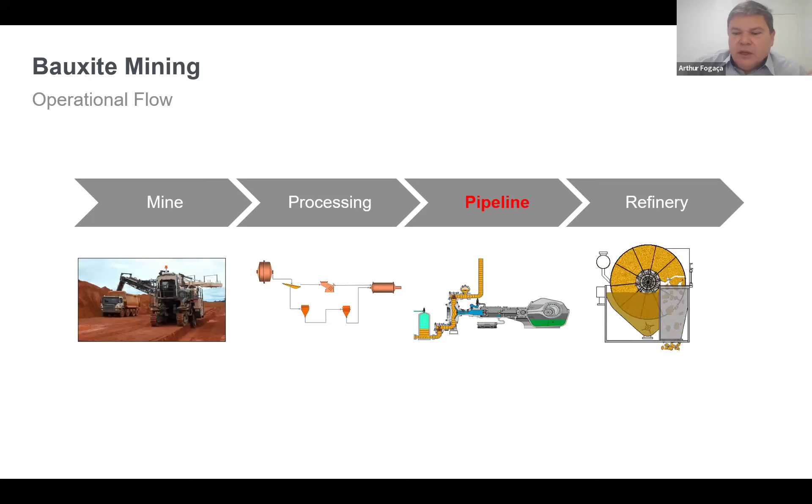And the next process is the refinery, which manufactures alumina. Here's an overview of the pipeline. This slurry line is placed in the northeast of Pará. As you can see in the middle of my screen, we have the route of this pipeline. It starts at the mine, placed in the Paragominas municipality, crosses seven municipalities, and arrives at the refinery in Barcarena, near I believe 50 to 70 kilometers from Belém.

The total length of this pipeline is 244 kilometers. We have two pump stations: the beginning of the pipeline at kilometer 0, and in the middle of the route, pump station 2, placed at kilometer 116.

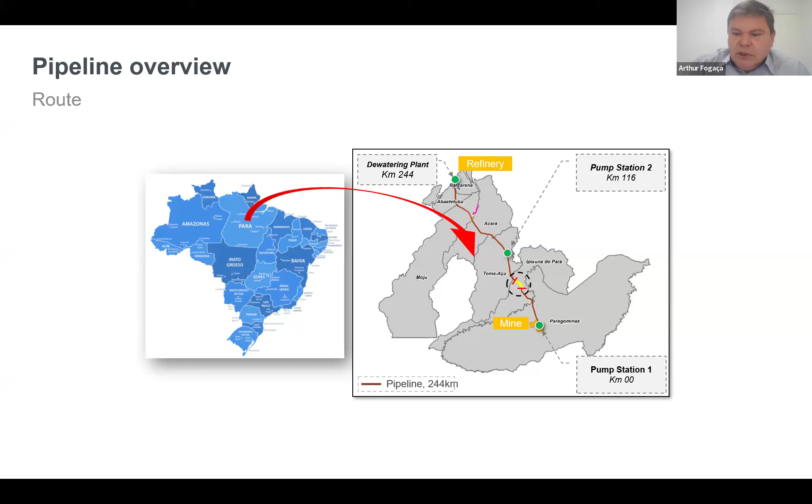This slide shows us some features about this pipeline, like age—it's almost 17 years. The total length, as I said, is 244 kilometers. The external diameter is 24 inches, and the pipe material is a very common carbon steel, API 5LX70. The wall thickness ranges from almost 8 to 20 millimeters.

The speed of this slurry is 1.7 meters per second, and the total travel time is 40 hours. The capacity of this pipeline is almost 11.3 million tons per year, and the concentration of solids in this slurry is 50.5% bauxite ore, with the other part being water.

In this picture I brought some samples of bauxite slurry, showing the color of this slurry—we're talking about slurry solids. Another point is particle size specifications. I tried to explain with this picture the granularity of the slurry; we have several types of particle sizes in this slurry.

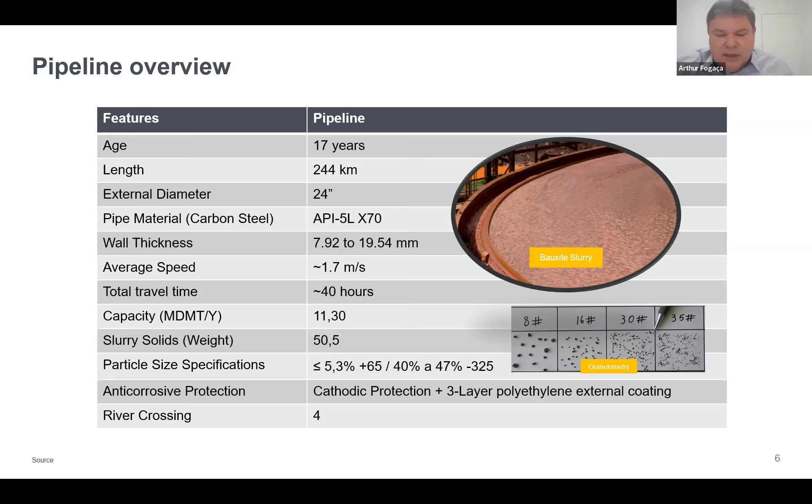I will explain the next slide. This graph shows the profile of this pipeline. In the horizontal axis, we have the distance in kilometers, and in the other axis, we have the height.

The pump station at the beginning of this pipeline is placed at 120 meters above sea level. Along the route, we have another pump station, placed at 116 kilometers.

At this point, at the end of this pipeline, we have the dewatering plant. I'll bring more details in the next slides.

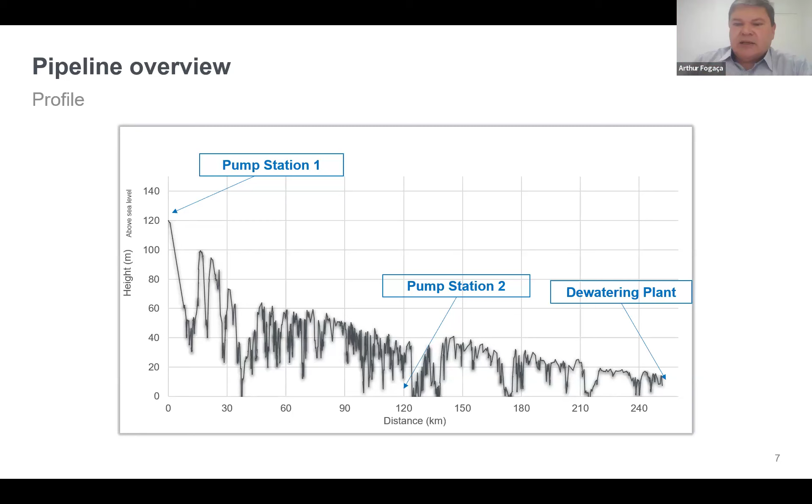Here we have some pictures about the facilities of this pipeline. In the top left corner, we have pump station 1, the beginning of the pipeline. On the opposite side, we have pump station 2, placed in the middle of the route.

Below this picture we have a DPB, which means the dewatering plant bulk site. Along this pipeline we have 4 PMS, which means pressure measurement stations. That's a small container with a branch with an intake to a sensor that transmits data about pressure and temperature by optical fiber to the control room.

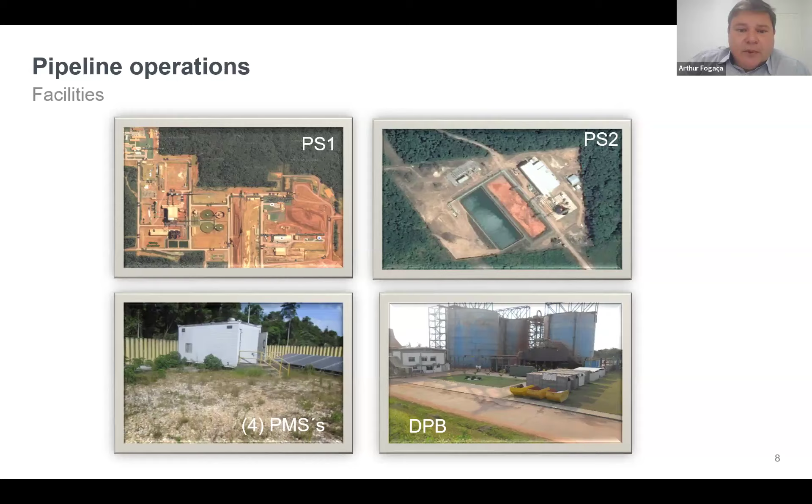Here we have the features of the pipeline. It crosses 4 huge rivers, huge rivers meaning 800 meters to 1 kilometer of width. We use a methodology to cross this below the river, called HDD. HDD means building this pipeline below the river, pulling the pipeline so it crosses the river.

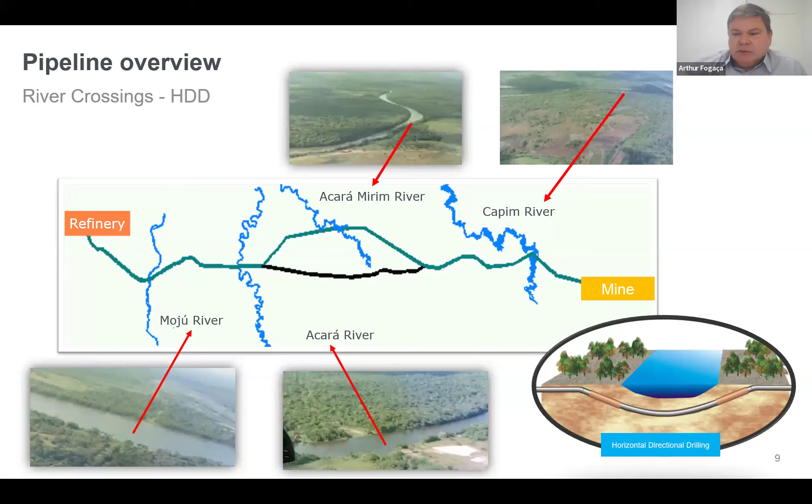After this, these storage tanks feed the mainline pumps, the 7 main pumps. That's a kind of positive displacement pump. After this, we start the beginning of the pumping process.

We restart the pumping process, and the slurry arrives at pump station 2. That station is like a twin of the first, but the difference is we have just 1 storage tank and 6 pumps, though the same kind of pumps.

After this, we restart the pumping process again, and we arrive at the end of this pipeline, placed at the dewatering plant. The dewatering plant is responsible for separating the bauxite ore from the water. At this moment, we start a new process in the refinery to process the bauxite ore.

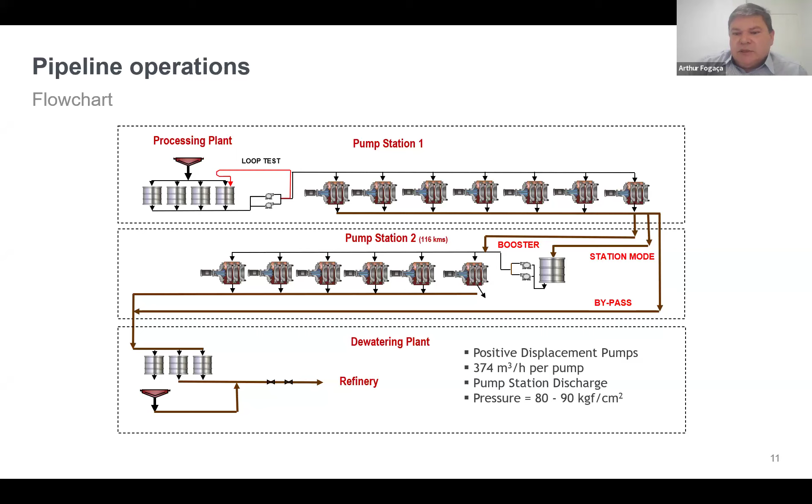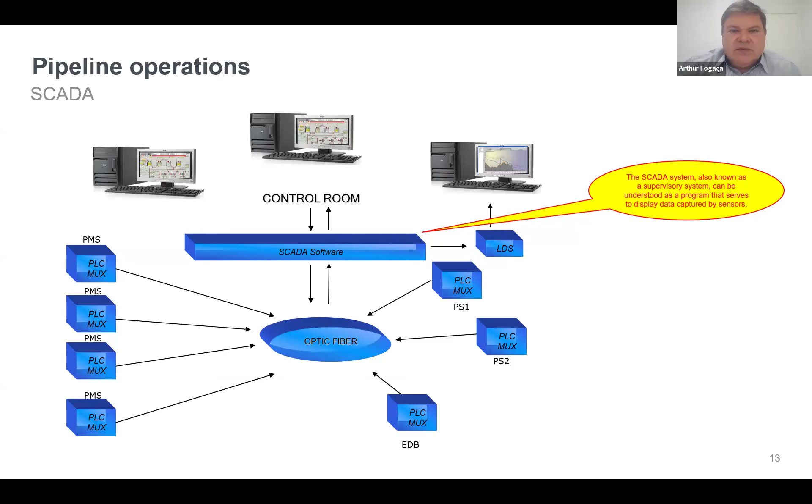Here we have a software called SCADA. It's very commonly used to monitor data in the control room. We have infrastructure here including PLCs, fiber optics, computers, and software too, all used to monitor data in the control room.

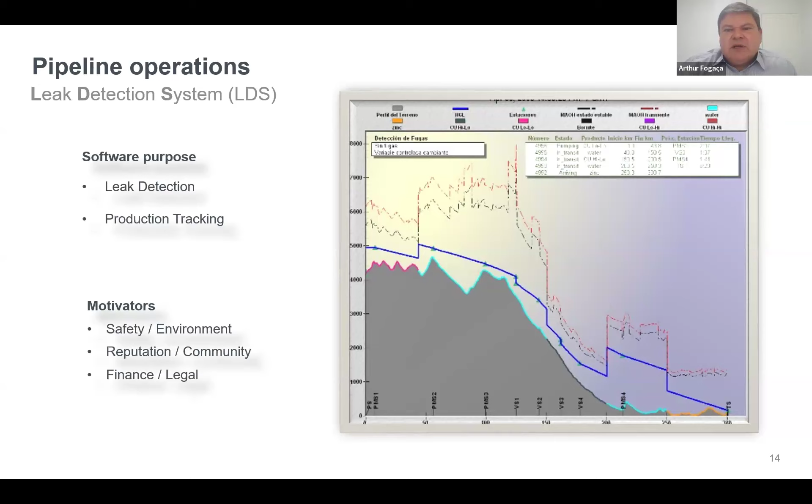This is another software very used in mining companies, called LDS. It monitors variables about flow rate and waves of pressure to detect a possible leak of slurry along the pipeline.

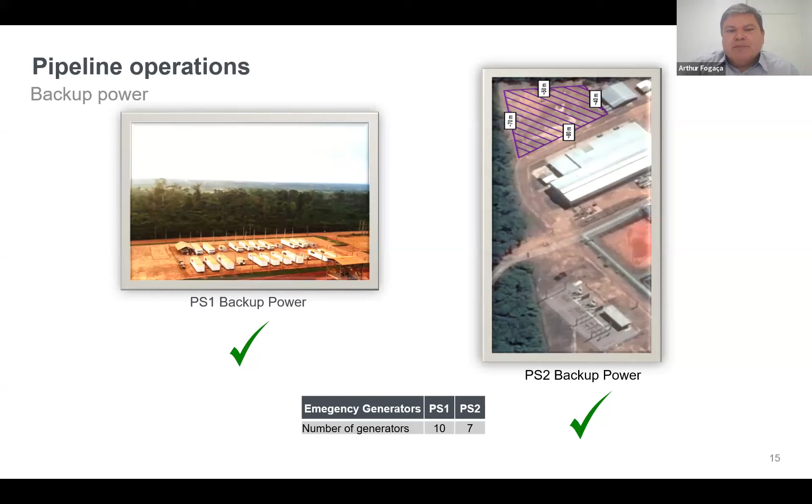Here are some facilities I shared with you. That's what I call backup power - 17 diesel generators that we have in pump station 1 and pump station 2. We use these equipment when the power supply is interrupted, feeding the electrical room to restart the pumping process to avoid shutting down the pipeline.

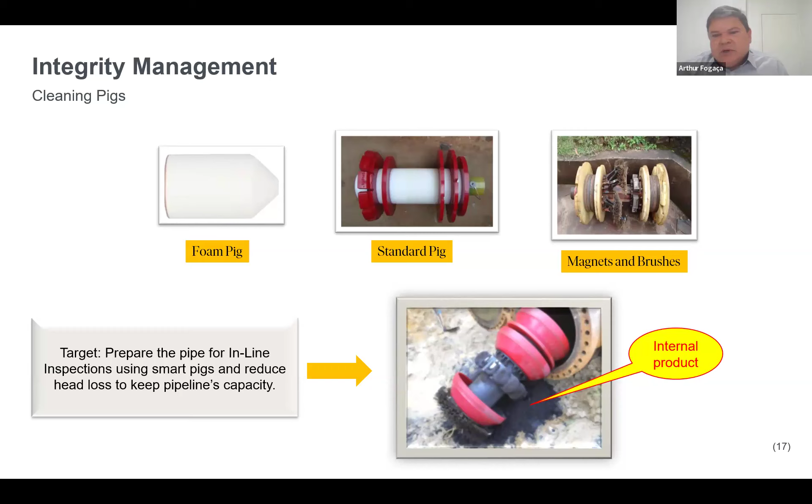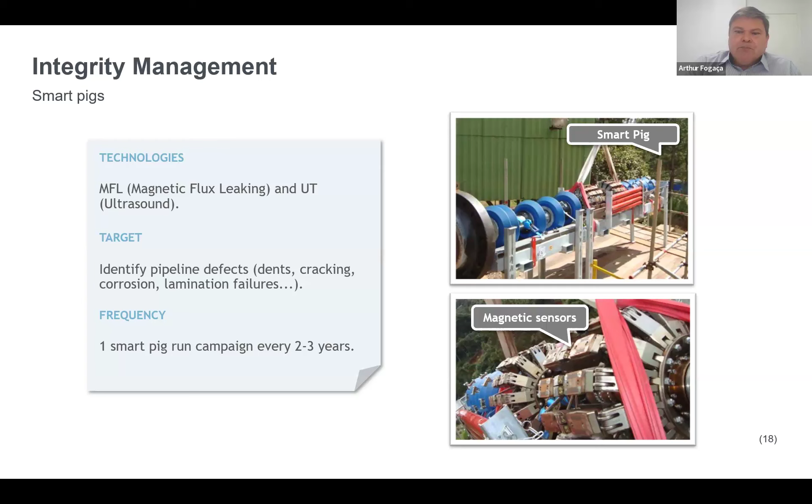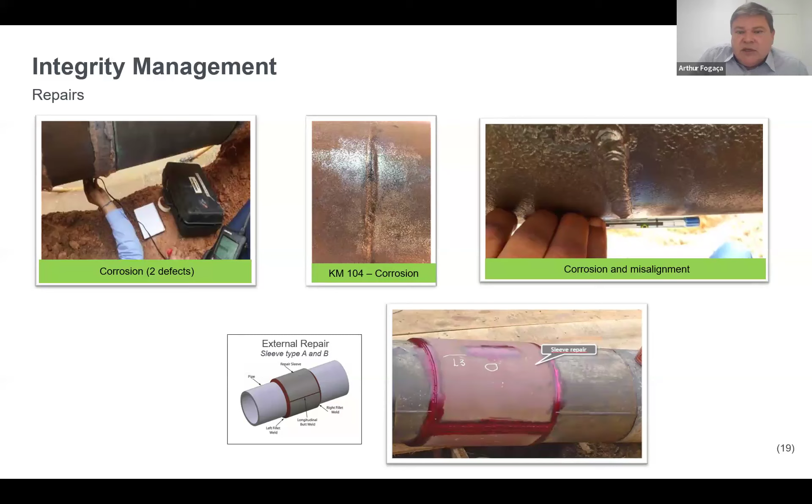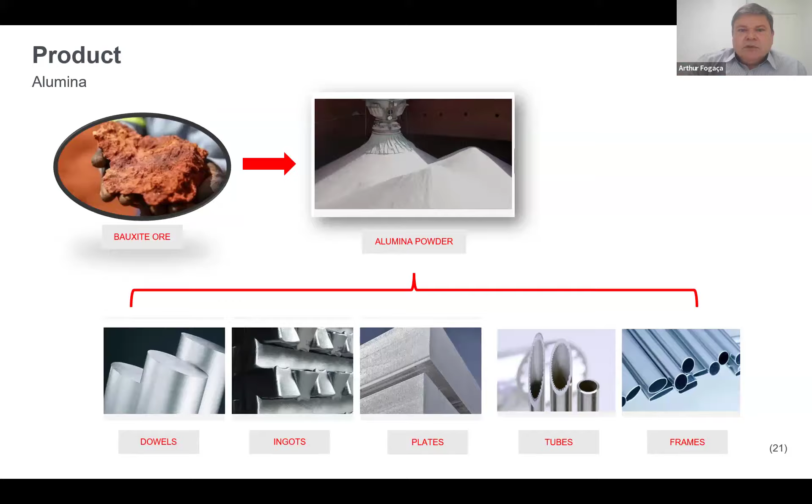So we have reached the end of my lecture. I hope everyone enjoyed it. And if there are any questions, please do not hesitate to ask me.

Congratulations, Arthur. Hello, now we have 15 minutes for questions and answers. If anyone wants to speak to ask questions, feel free to do so. Hello, Arthur. Hello, nice to see you, Ricardo. Remember me? We worked together. Good to see you. Good to see you. Very good presentation, thanks. And as you know, I always have some questions, so I do have a question for you, and for sure you can answer.

You explained a lot about slurry lines. It was very clarifying to me. However, I would like to know how you see the difference between slurry lines and gas lines, for instance, because in Brazil we have a lot of gas lines and oil lines, and I think it would be very fruitful if you could explain the difference.

Okay, that's a very interesting question, Ricardo. Thanks. So basically, Ricardo, the main difference is the slope of these pipelines, because of the rheology of this slurry. When we talk about slurry, as I said, we have some particles - iron ore, bauxite, phosphate, whatever. So it's very important to follow this slope, because if you don't follow it, you can have a settlement of these particles in the bottom of the pipe, and this will cause a blockage of the pipe, and we have a shutdown of the pipeline. So that's the main feature, the main difference.

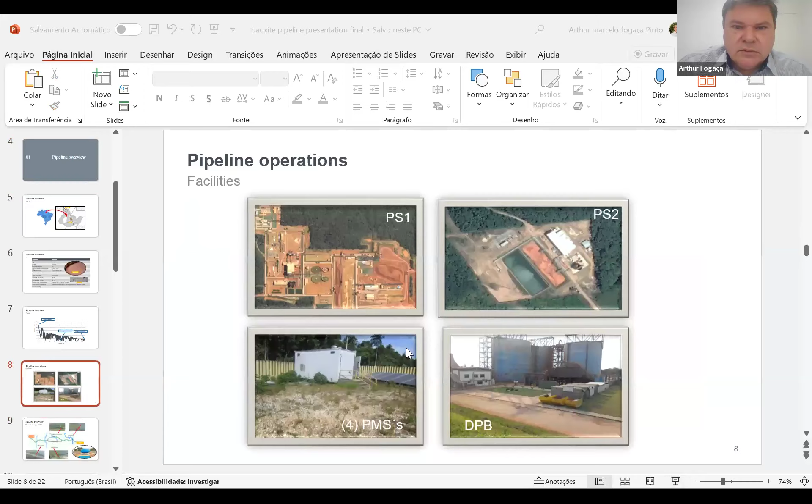Okay. I believe I will share my presentation again, this slide, because it's very didactic. Let me see. I need to share the screen. Just one moment, Eduardo. Oh, so this is it. Can you see my screen? Yes, I can see. Sorry. Oops. Here.

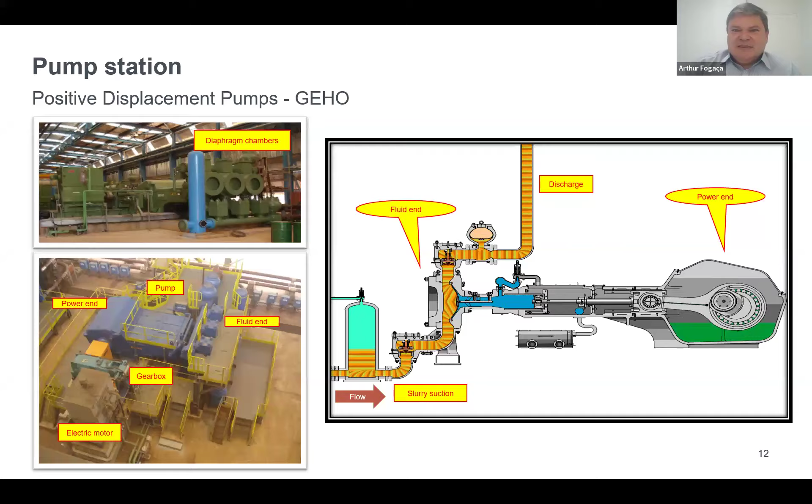We have another question on the chat from Pedro Jaya. He congratulates your presentation and asks you to explain more about the consequences of slurry pipeline leakage, and if you've been in a situation like this before in your job. Unfortunately, during more than 20 years of my career, I participated in 5 accidents with slurry leaks.

The problem is that when you have a slurry leakage, the leakage always runs to the streams, the small rivers. That's the problem, because we increase the turbidity of the water, and along this stream we have several communities that use this water. We have farms, so this is terrible, unfortunately. That's the biggest problem, of course.